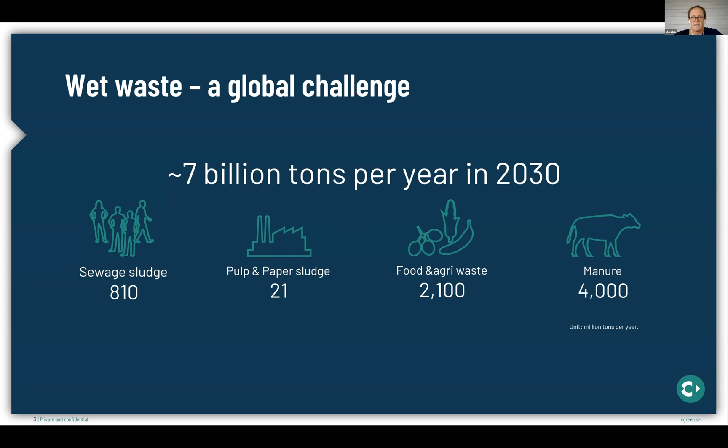The current ways of sludge handling are simply not good enough. They all come with severe impacts. They cause immense emissions of greenhouse gases. They risk harmful substances leaking out in nature. They're not infinite, or they consume huge amounts of energy. So clearly, we need to find something better.

At C-Green, we want to change the mindset from seeing sludge as a waste stream to seeing it as a source for useful resources. We want to make it valuable. We enable the recovery of carbon and phosphorus, while at the same time ensuring that harmful substances are contained or destroyed. How do we do this?

By combining the two processes of hydrothermal carbonization and wet oxidation, we transform the sludge into hydrochar in an energy-efficient way. 5 kilograms of wet waste are transformed into 1 kilogram of dry hydrochar. This means a huge volume reduction of the material that needs to be handled. The decomposition that is emitting methane and nitrous oxides is effectively stopped. The hydrochar is stable, odorless, hygienized, and safe.

We go from a substance with negative impacts, high risks, and global costs to a useful product that can find several new applications. Hydrochar has a much higher low heating value than sludge and can be directly incinerated and used as a biofuel. Hydrochar contains carbon and other nutrients and, depending on the origin of the sludge, can be used as a soil amendment product.

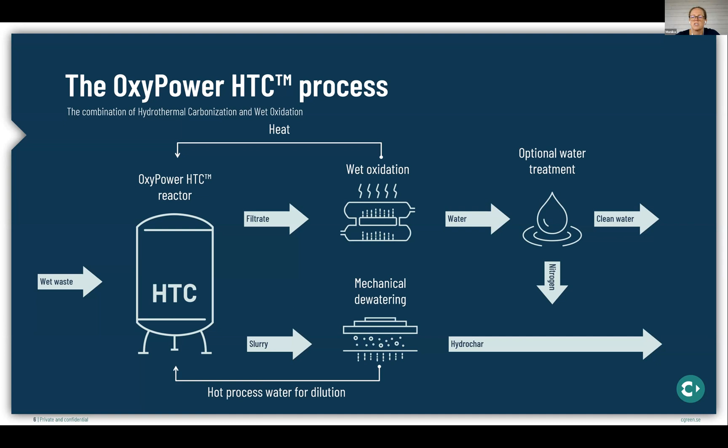C-Green is designing its process in 3 different sizes to meet the market demands. The small HTC pilot plant, T1, can treat up to 1,000 wet tons of sludge per year and is aimed at small remote wastewater treatment plants looking for volume reduction and sanitation of their sludge.

It can also serve as a first step for validation of the technology prior to decision for investing in an industrial scale plant. The T5 can treat 3,000 to 5,000 wet tons of sludge per year and is designed to meet the needs of small municipalities, treating the sewage from 30,000 to 70,000 people. It can also be combined with biogas and serve medium-sized farms.

The T25 is the full-scale industrial plant. This one can treat up to 20 to 25,000 wet tons per year. The plant is built in skids in a modular design, which allows for scaling upwards by adding multiple parallel processing lines.

So who is C-Green? C-Green is a Swedish clean tech company founded in 2015. Our headquarters are in Stockholm, Sweden, where we also operate a state-of-the-art laboratory. We have one full-scale plant in operation in Finland, and we have a sales office in Rotterdam.

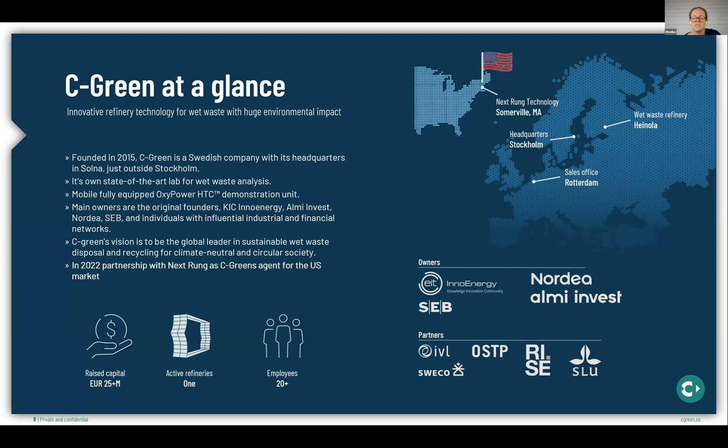Our first full-scale demonstration plant is set up at the fluting mill in Heinola by Stora Enso in Finland. Stora Enso is a top-tier global pulp and paper company. The C-Green plant has been in continuous operation for around 2 years, producing hydrochar from the plant's biosludge.

The project shows a perfect site integration where the hydrochar is used as biofuel, replacing fossil peat, and the reject water is fed to the plant's sewer, contributing with heat and nitrogen.

Together with the municipality of Heinola, Stora Enso and C-Green have carried out 2 trials with municipal sewage sludge. These trials have been successful and have produced a high-quality hydrochar at dry solid contents up to 70%.

More trials are also planned with interested stakeholders such as Finnish Gasum and with the feedstock from other mills within Stora Enso.

Currently, C-Green, together with waste handler Ragn-Sells, the leading waste management company and one of the biggest sludge handlers in Sweden, is in the process of building the second full-scale demonstration and development plant. Here, sewage sludge from the nearby municipal wastewater treatment plant will be treated.

The project will demonstrate a full circular solution for sludge that does not meet the quality requirements for direct spreading on farmland. Nitrogen recovery through stripping will be installed as an optional technology, producing ammonium sulfate liquid for the fertilizer market.

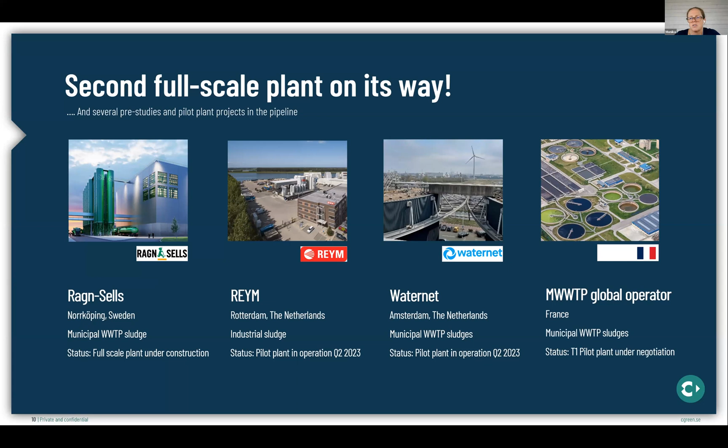So there is a lot happening in the market of finding circular applications for sludge management. And we are very pleased that in Next Rung, we have found a partner to look at the American market together. So over to you, John.

Just a quick word about Next Rung Technology. We're an engineering consulting company located in Somerville, Massachusetts, out of Greentown Labs, America's largest clean tech incubator. Many water and wastewater technologies have come out of there for commercialization, as well as energy, renewable resources, and plastics and fuels. Our mission is to support environmental technologies like this.

Since 2017, we've scaled up over 100 clients' technologies to true commercial scale. We work for first-of-a-kind, second-of-a-kind installations, as well as larger scale projects. Our projects range from $300,000 skids up to $200 to $400 million plants and projects.

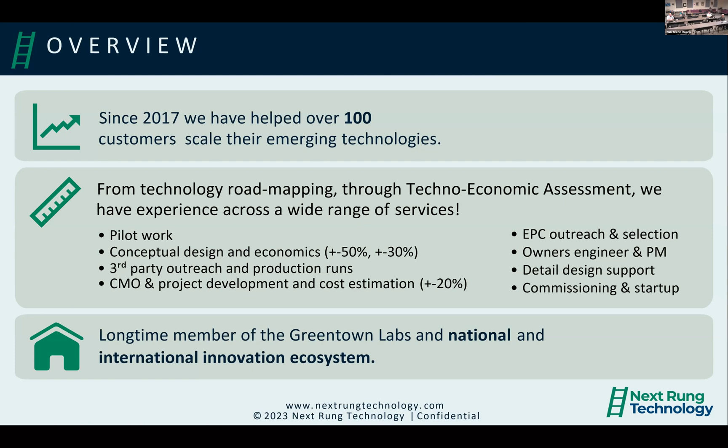We have been partnering with C-Green since 2020, when we did their first market study for coming to the United States. We looked at all the available sludge sources in the US and identified municipal biosolids as a key market for them and a good application.

I had the opportunity to go to the Heinola mill at Stora Enso and see the system in operation. You can see its size, it's modular—about 8 to 10 container-sized modules, processing all the solid waste from that mill's anaerobic digester, and literally producing one dumpster's worth of solids a day. Got to see the tremendous sludge reduction in action.

In particular, we think this becomes interesting and important when you're thinking about PFAS. The conditions of the HTC do not cause PFAS destruction, which requires a much higher energetic level. So primarily you would get aggregation of PFAS in any of the biosolids into the hydrochar itself. There's also some in the returning effluent, which would go back to the headworks of any plant it was located at. We think the solution here is to achieve volume reduction and upgrading of the solids at the right locations, collect those biosolids, and then if they do require disposal or destruction of the PFAS, to do that centrally, regionally at one location, as opposed to putting a lot of solutions out to discrete POTWs.

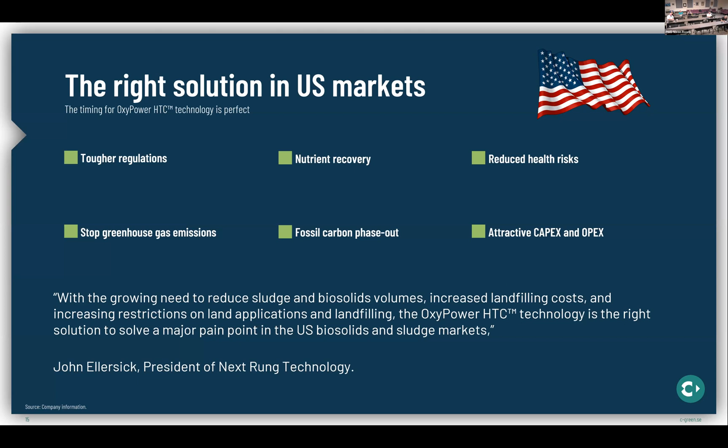As Monica said, the issues in the United States are similar to those in Europe. Places to dispose of biosolids are becoming more costly, or it's being banned completely. People are recognizing that there's greenhouse gases coming out of their municipalities at the back end, and there's something they need to do about it. Generally speaking, if you can reduce the problem to 20% of its original size, you can definitely address costs, even if you have to do disposal methods that are probably eventually going to be phased out. So that's our presentation. We'd be happy to welcome any questions.

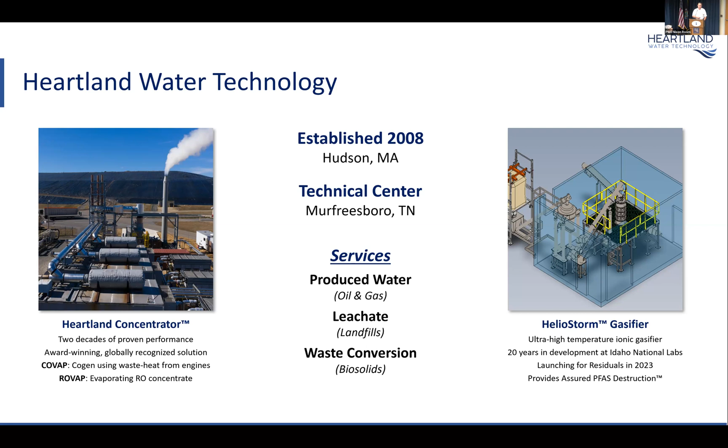So again, as has been said on Tuesday, and has been pointed out this morning correctly, we're here to focus on regulatory compliance that has become acutely necessary as a result of recent legislative and regulatory activities in the state. We believe we can provide assured PFAS destruction by virtue of our Heliostorm technology, and we do that by delivering complete molecular dissociation of the feedstock as it cascades and passes through the system from top to bottom. We'll talk more about that in just a moment.

But from that, we think we open up pathways to disposal certainty, right? Because we're producing products that are now innocuous, a char and a syngas, and they're PFAS free, and it now opens up disposal channels that might be more elusive to traditional strategies that focus on Class B, Class A biosolids.

And from that, we're going to operate it as a service. We offer this as a service. We're not here offering a capital piece of equipment for sale. It's a service that we provide. And by virtue of that, we can provide cost certainty for many, many years to come. We are certainly interested in the long-term contractual arrangements that have been described in the RFI. 10 years, 20 years is certainly within our wheelhouse, and is certainly our interest.

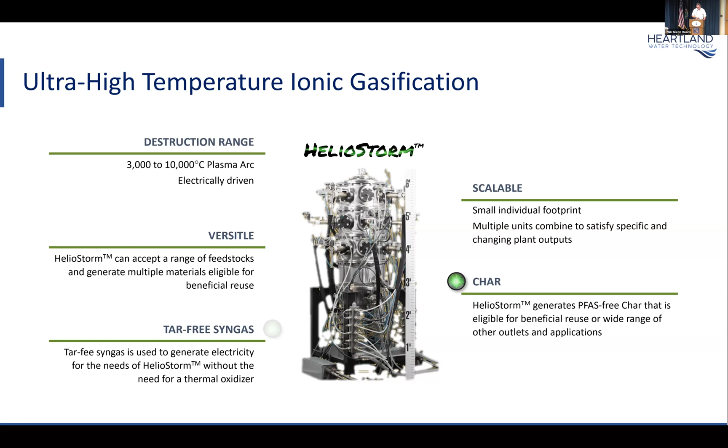So with that, I'd like to introduce now Brandon Davis, our Director of Engineering. As I mentioned, he's going to walk you through the next few slides, and I'll advance them for you, Brandon, if you'd like to walk us through the details on the unit.

All right, good morning. I'm assuming you can hear me? Yes. All right. Good. Hold on, I'm getting some echo. See if that's better. Still hear me?

Yes. All right. So the Heliostorm is an ultra high temperature plasma gasifier. We call it an ionic gasifier because essentially what happens is we generate free burning electrical arcs. And these arcs, as Jim mentioned, heat the interior of the gasifier up to that 3,000 to 10,000 degrees Celsius range. And that tends to generate a lot of ions. And that ion field and that ion electric activity then tends to completely dissociate the feed material down to its constituent atoms.

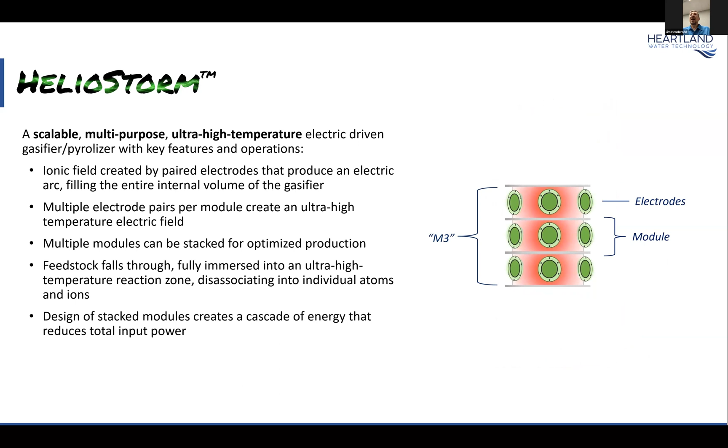As you can see on the graphic to the right, the model that we'd be using for this application is called an M3. And essentially what that means is that we have 3 of these plasma arc modules. And in each of those modules, we have 2 to 4 pairs of electrodes that generate these high temperature electrical arcs. And so you end up with a sort of cascade of energy, where as the feedstock falls in, it gets very rapidly heated up and volatilized.

And then those volatiles are exposed directly to those electrical arcs and those ions that are being generated. And that tends to dissociate things, and that completely breaks down whatever is in there to their atoms. And that is why this gasifier is very good at getting very high conversion rates, and also is very good at chemicals of concern like PFAS, breaking them down and completely mineralizing them to the constituent atoms. Do you want to go to the next slide, Jim?

The Heliostorm is different in that the anode and cathode are separated across the body of the gasifier itself, so that high energy electrical arc is in the gasifier itself. And so that means the feed material is directly exposed to that high temperature arc. And that's sort of the difference, sort of the secret sauce, and what makes this gasifier more effective and more energy efficient than your normal plasma gasifiers.

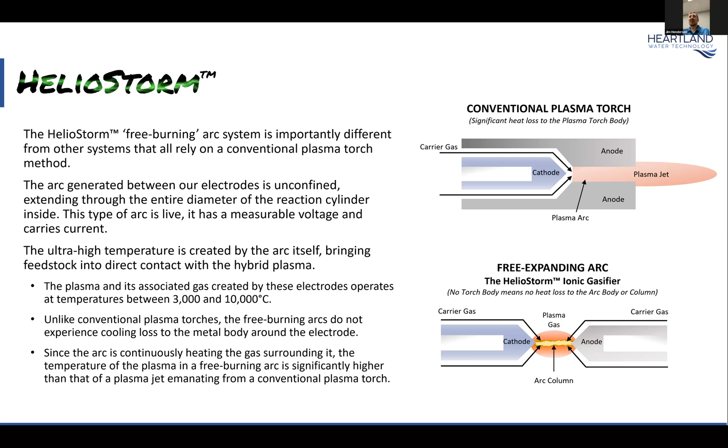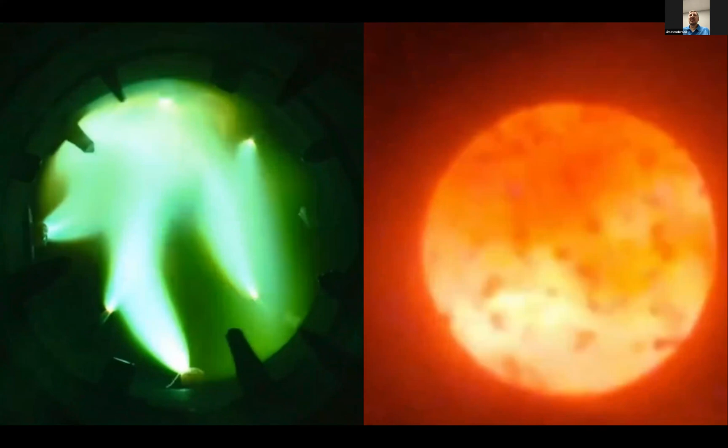On the right is another view of it. And you can see as the pellets fall into the gasifier, you can see how they're being rapidly devolatilized. You can actually see the wisp of smoke as things are coming off and being volatilized and generating that gas.

And then you can also see the very turbulent nature of the gasifier, that as these plasmas are being generated, there's a lot of high mixing, a lot of turbulence in there, which is really exposing all the gas and all the feed material to these high energy arcs, exposing them to the ions, rapidly breaking them down. And so it operates very efficiently, typically at about 4 or 5 tons per day for the M3 gasifier.

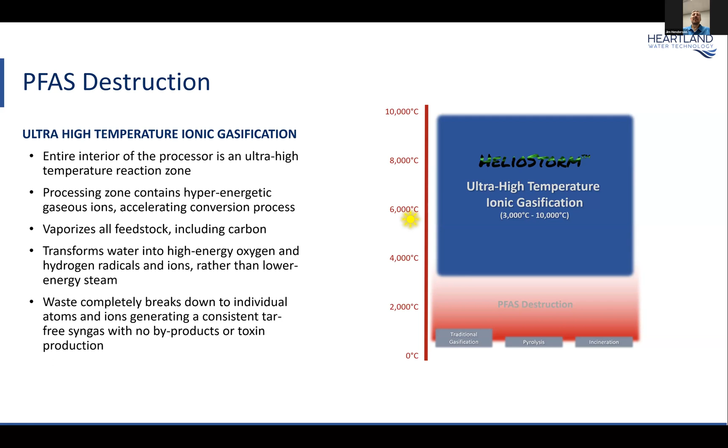And so you completely vaporize everything, including carbon, and then as you fall out of those plasma modules, you have a rapid quench as it cools off, and you reform the compounds basically according to thermodynamic stability. And so you make a lot of simple compounds, hydrogen, carbon monoxide, nitrogen. And because that temperature quenches so quickly, you don't get a lot of the secondary reactions. So you don't repolymerize into tars and oils. You don't have a lot of the byproducts that you typically get in other gasifiers.

Even the nitrogen itself in the fuel rapidly becomes nitrogen again and then quenches, so it doesn't react anymore. And so we have essentially no ammonia and cyanide and those sort of reduced nitrogen compounds that usually lead to NOx problems when you go to burn that syngas with other gasifiers. And I believe this is where you're taking back over, Jim.

Yeah, thank you very much, Brandon. Appreciate it very much. Great description and explanation.

So I mentioned earlier on that the versatility of our platform, Heliostorm, can accommodate a wide range of feedstocks, right? It doesn't know the difference between biosolids or heterogeneous waste or methane for that matter. It can accommodate it all. And as a result of the feedstock that you feed it, it can generate different products, right?

So in this case, we are intentionally focused on processing and managing municipal biosolids and other sludges, but are certainly involved in some other projects as well around, for example, methane and converting that into hydrogen and other opportunities as well. So our real focus as a company right now, again, I'll just emphasize, is on the municipal biosolids, creating the syngas and char.

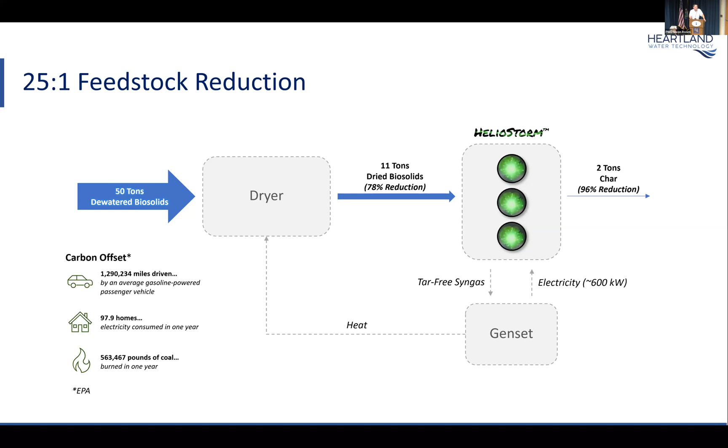With that, I'd just point out we can achieve some carbon offsets doing this. That's why we believe there's a real advantage to this technology, in that we take a lot of trucks off the road. It was mentioned on Tuesday, and I'll repeat it here: we take 4 out of 5 trucks off the road if we rely on this process, and there's some real gains to be had there.

So certainly a question in everybody's mind is documentation around the assured PFAS destruction piece. We are undertaking a very prescriptive approach to that. This year, we have 3 events scheduled to do just that. The first one was earlier this year with our M1 unit, and we have 2 more, but the first one was extremely encouraging. We in fact overdosed the feedstock purposely to quantify the amount of removal we are getting, and even with that, we exceeded our expectations. We now move into testing around the M3, to be completed this year. Brandon, would you like to comment any further on that?

No, you've got it right. We've done some preliminary testing on the M1 earlier this year, and we're planning to do additional testing. As you mentioned, in the early testing we spiked it with AFFF to get a very high amount of PFAS in there, and the results were very, very good. We're looking forward to the testing we're going to do for the rest of the year.

What's good, in terms of results? Well, we were in the very high 90% range of removal and destruction with a single M1 unit. We were purposely trying to overdose the feedstock so we could get a quantifiable measurement and have some residual left at the end for that first tranche. So it was intentional to do that.

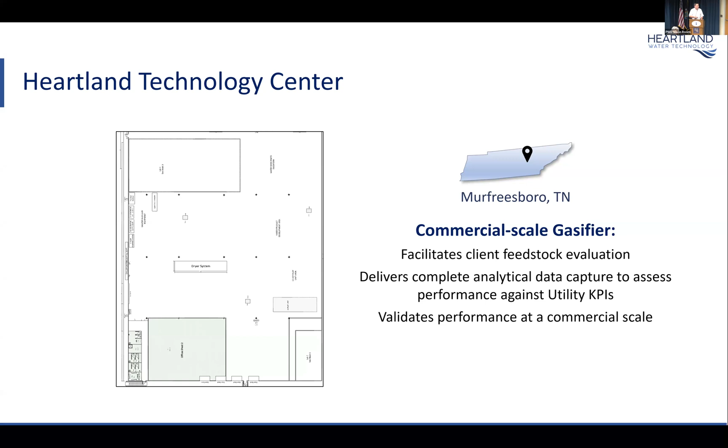It is operating as we speak today, and our official grand opening is in September, where we'll be hosting an event for that. But just a little peek back behind the curtain, here are some quick photos I took when I was there a couple of weeks ago, as the team was bringing the system online.

You can see in the center, that's the basis of the HelioStorm. There are certainly some ancillary things that go along with that, but that gives you a good example of the scale of the unit and some other ancillary balance of plant components, which you would see if you'd like to join us and see it for yourself. We'd love to welcome you.

Our project delivery is really based on a build, own, operate model. We are intentional about owning it and staffing it so we can deliver the guaranteed results you'd expect. We have the in-house team to design it and the resources to build it, without expectation of any client capital up front. We will fully fund the system, staff it with our own certified personnel, and provide it on a turnkey basis. That's all delivered for a one unit fee on a monthly basis, on a per ton basis.

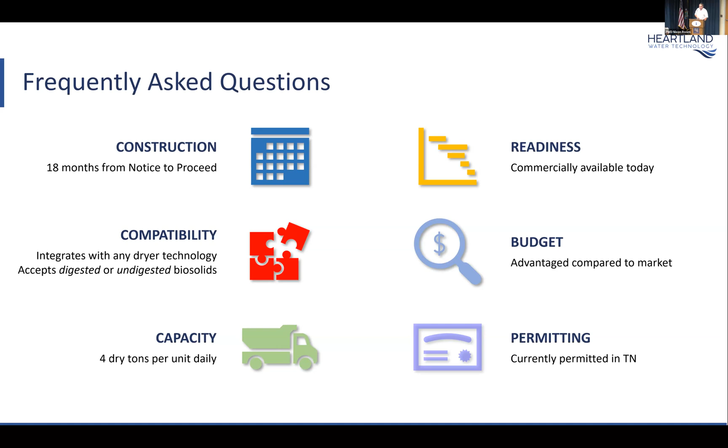And I hope I got in under time. Thank you, and if anybody would like to contact me, my information is there. Thank you very much.

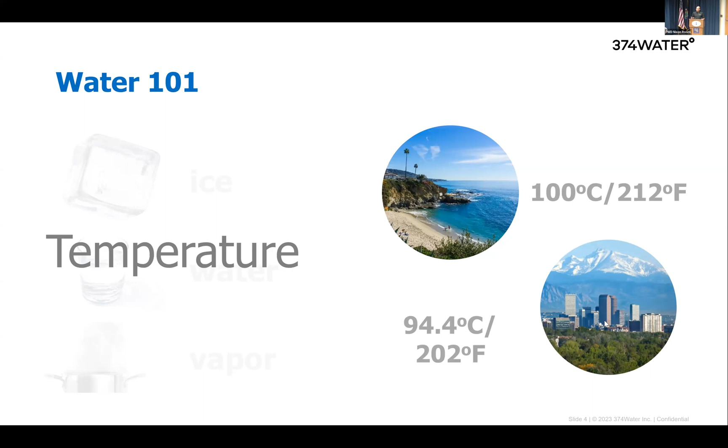If you were on the beach, you can boil water at 100 degrees C. This is a well-known fact, though it's an average, because there's still some variation in gravity, I would imagine. But if you were, say, in Denver, you would need far less heat to get your water to boil. This has to do with the atmospheric pressure being lower. So with lower pressure, you can boil water faster. On the contrary, if your pressure is high, it takes a lot of heat to boil the water out. So pressure is the second most important factor in phase change, and the reason I bring this up is they counteract each other.

Understanding this concept, we are able to perform what we are trying to do next, which is take your sludge and go straight to supercritical without having to undergo any intermediate phase change, which typically results in things like what you'll see in your boiler, some scaling. That's because your water evaporates and leaves out the solids. Whereas if you were doing it under pressure, the water will never evaporate. That's exactly what we're trying to do here, so we go straight from sludge to supercritical.

We are treating most of our waste in the water or slurry phase. So sludge around 15% is typically what we are targeting in the municipal application, but it could be pure AFFF, which is a liquid, so we could be processing liquids as well. It really depends on the caloric content of the waste as opposed to the dry solids of the material.

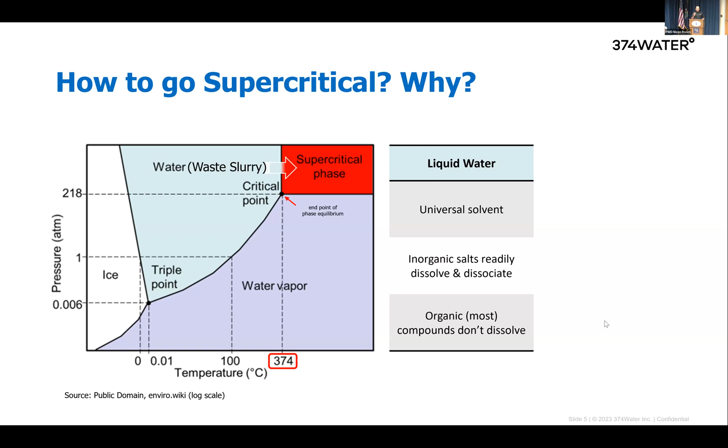Why I bring this up is when we go supercritical, that property of water actually flips 180 degrees. In other words, the salts will now precipitate out of the water, and the organics, the pepper, will now dissolve, dissociate, and disappear. So pepper literally will go from being grayish black to invisible in the supercritical fluid.

So pretty much any organic waste—it could be poop, it could be PFAS, it could be a piece of ham—whatever you throw into it will completely dissolve, dissociate into its most elemental compounds. This is pretty similar to what Brandon mentioned earlier about dissociation under plasma. The same thing is happening because supercritical is halfway between boiling water and plasma.

In fact, it's not halfway. It's much closer to boiling than plasma, because plasma on the screen would literally be out there.

So this unique property of water to dissolve organics is what we're trying to tap into. All we need to do is introduce an oxidant. In this case, we use air as the oxidant. So simply taking any organic waste, bringing it up to supercritical condition, and adding air, your resultant is carbon dioxide.

Clean water, and you get your minerals. When I say minerals, these are salts which are formed because the inorganic fraction will eventually form a salt, including your fluorine, if you have PFAS in your waste.

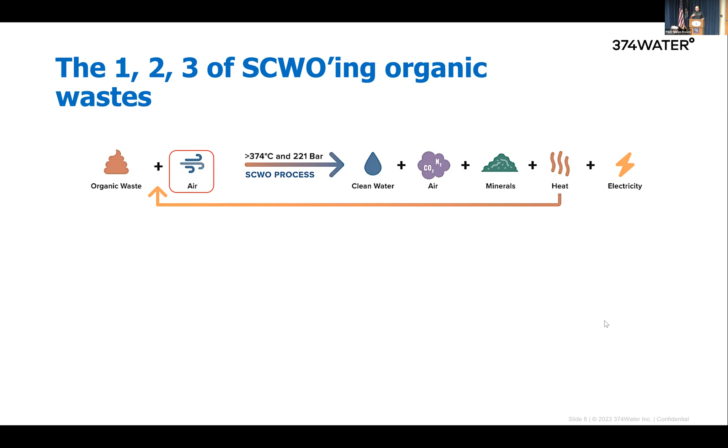So it's a highly energetic process, and you're able to do all of this in a matter of seconds. In a matter of seconds, you go from organic waste to clean water and energy.

How does it work? It's a pretty simple setup. Our reactor is a piece of pipe, so it's not a very complex machine at all. It's a piece of pipe under pressure.

We take ambient air, preheat it with the heat of reaction, and we do the same thing with the waste, preheating it with the heat of reaction. Simply by combining those two and introducing it to the reactor, you can take it from subcritical, unphase-changed gas and water or liquid, and go supercritical into one homogeneous medium, and that's where the oxidation happens.

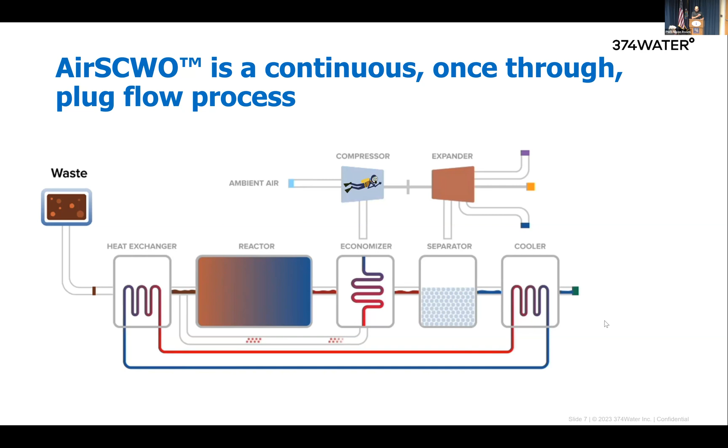The nice thing about a process like this is it's all happening under one homogeneous phase. It's not solids, liquids, and gases we are treating—it's all supercritical, which means your kinetics need to be set for just that one medium. We are not worried about how rapidly the gas is expanding in an incinerator, so we don't have to worry about 3 different kinetics to go after PFAS or any other compounds. We destroy all of it under one phase, very simple. The outputs, again, are very simple and benign.

You get your carbon dioxide, which we do count even though it's biogenic carbon dioxide, we would count it as a greenhouse gas. You will produce energy from the expansion of the gas itself being captured in an expander. You will produce distilled water. About 70% of the water will come out as distilled water, which means you can either disinfect and discharge it, or if there's a potential for reuse, you could use that.

And the other 30% will essentially carry those inorganic salts out. And if there's any residual PFAS, that will come out in this water, which comes out with the mineral. It's not in the air, it's not in the distilled water, and I will show data.

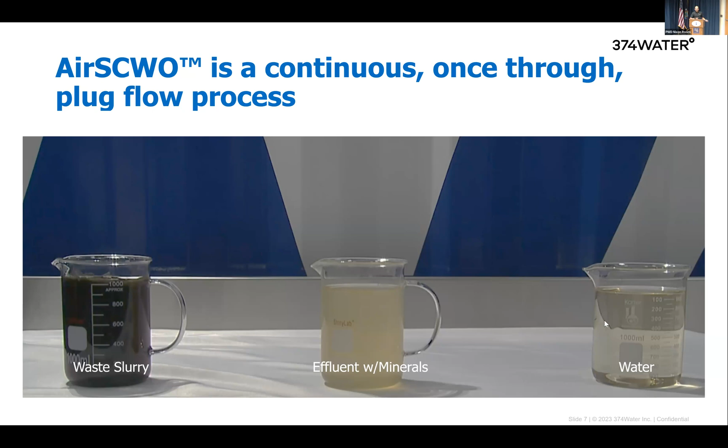So this is just an example of how it looks. It's not very clear on the screen, but you have waste going in, you get your distilled water, and you also get your minerals come out in an effluent, which needs to then settle out, and then you will separate. There's a separation step that needs to be taken into account for, which we don't do in our process right now.

So it doesn't matter what you put in, you can get the same output. In other words, if PWD has a drinking water partner who has GAC at their facility and they want to get rid of it because it has PFAS, you can do that too.

This is an example of GAC being slurried and processed. Of course, GAC being highly energetic, you'll have to dilute it down. So if you blend it with your sludge, you're able to still process it. Again, we are trying to target a certain caloric content going in, so it's not necessarily about the percent dewaterability.

Now, I already touched a little bit about how efficient it is, but I'm going to show you some data. This happens to be a sludge which had lime stabilized sludge from your state. And you can see here, we took about 6 seconds to treat this. No co-fuel, we were just dewatering it up to around 16% cake.

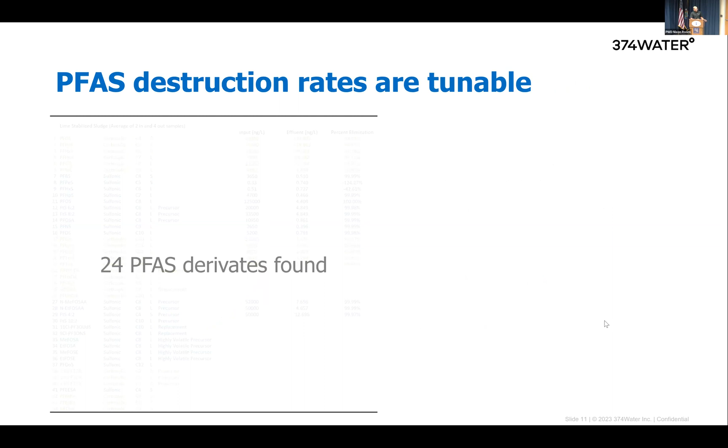You can't see the data here very clearly, but I've summarized it here. We found about 24 derivatives, and I'm going to give you a copy of this. And if I haven't already shared this, you can have the entire paper. And we got about 99.9% elimination.

Now, I'm sure people will say, why not 100%? We can get 100%, but it's not practical to use a system to get 100%, because in order to get 100%, you'll have to run longer or run it at a higher temperature, both of which will cost you money.

So instead, if you do want to get up to near 100%, the other way would be to simply combine this with a sequestering technology downstream. So you would treat the waste, and only a fraction, about 30% of the liquid from your sludge processing, which again is a fraction of your total wastewater effluent, would then be treated using a GAC or an ion exchange to get down to the levels of discharge water that you need.

So if you want to produce drinking water quality from a process, you are able to do this by combining these steps. Now, when you're done with this spent GAC or ion exchange or whatever, you can then take that and recycle it back, and we can destroy that as well. So essentially, we are able to destroy no matter what we put into the system.

The same can be done in a two-step process. Again, we don't recommend this for your scenario because the first scenario would be just as effective.

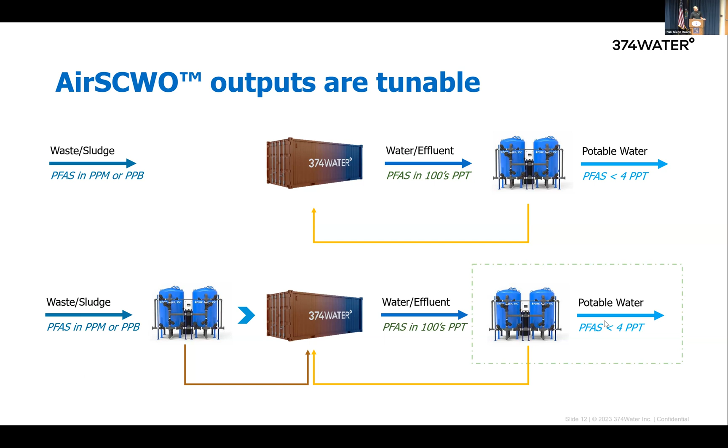So have we done fluorine balance? Of course we have done fluorine balance. We started as an academic endeavor, so of course we studied the hell out of this. We were able to get down to 100% recovery on our fluorine balance. So this, of course, took a lot of effort.

What we found is if you need to get up to that 100%, you really need to be running it at 37 seconds instead of the 6 seconds, which again is not practical, because at 6 seconds you can push X amount of volume. At 37 seconds, you're only getting a fraction of it. So your throughput will suffer if you go longer.

You can increase the temperature too, but the ideal scenario is to get about 3 logs or 3.5 logs of PFAS reduction through your process, and then take the small slipstream or side stream that comes off the process as an effluent and treat that using an ion exchange or GAC. That combination, I think, is the best way to go about it and the most cost-effective way of doing this.

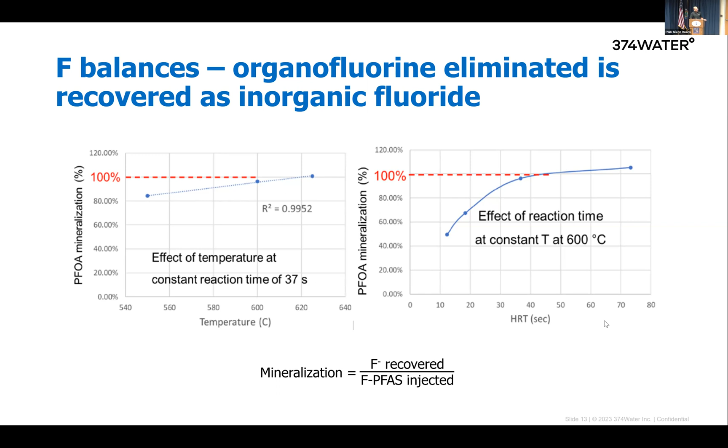Quickly, we did check for emissions as well, because that's a concern. Because when I showed the balance of 99.9%, we took into account the solids fraction, the liquids fraction, as well as the gas fraction. This was a test that EPA did on our process. The gentleman is from EPA.

We have done all kinds of tests with the SUMMA canister, with sorbent tubes. We have also done OTM 45 analysis. And we are also doing another test end of this month, again for EPA for another project. So we have seen that there are no PFAS coming off of the emission, which we're able to guarantee. So I think that's another thing that I need you to pay attention to: if somebody says they can do something, you may want to ask them for a guarantee.

So how does it compare with others? I'm going to skip this slide for the sake of not being controversial. This one, I think, is most interesting for you all. You can see here incineration, pyrolysis, gasification, higher temperature, lower pressure. Dryer again, lower temperature, lower pressure, and it doesn't do much other than just reducing your volume. HTC, wet air oxidation, HTL is getting closer to where we are,

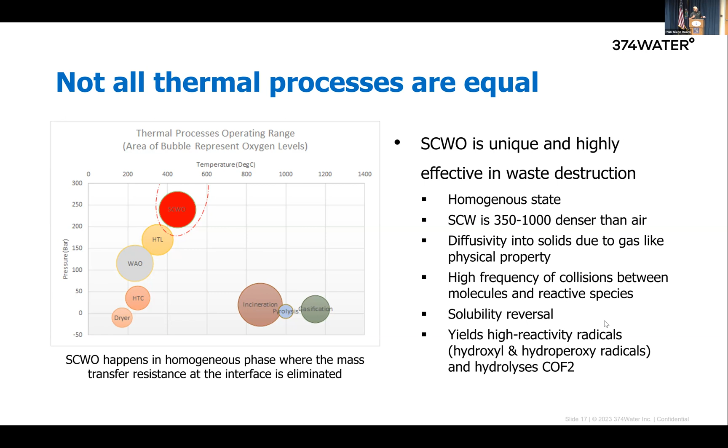but really supercritical in this boundary is all by itself in there. And the reason is that's the only process that works in a homogeneous state. There is no solid, liquid, gas. It's all supercritical. That allows us to really fine tune and be really efficient in getting rid of any kind of recalcitrant waste that you may have. You are not able to do that with any other technology without having any product of incomplete combustion or reaction, or a char or an oil or a coal, whatever the case might be; they all end up with some PFAS in it as well.

That's not necessarily true. Another thing we need to pay attention to is at what detection level those PFAS are being reported, because I've seen reports where someone had 2 parts per billion as the minimum detection limit. Guess what? At 2 parts per billion, there is no PFAS in your sludge in Maine at all. Ask him. You need to look at parts per trillion. You need to look at really low numbers. Anything that's not less than 1 part per trillion being reported, those numbers have to be questioned.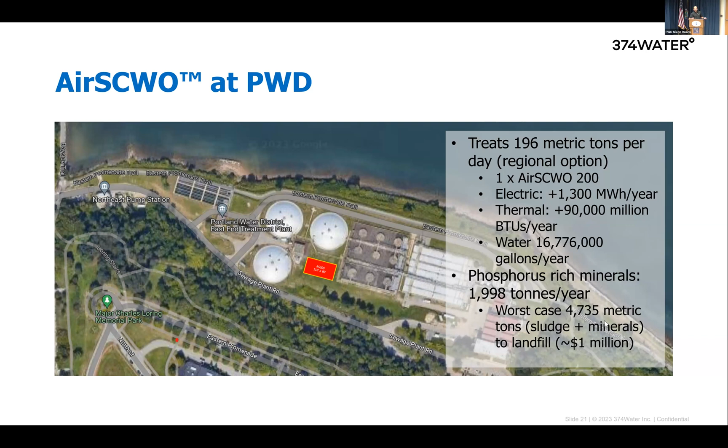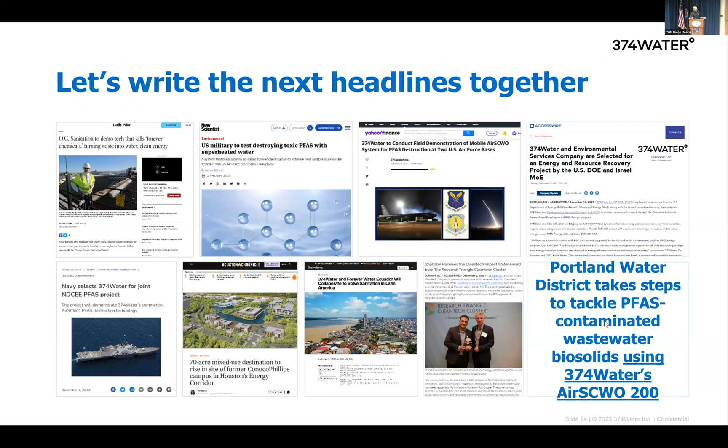So we do have a system that's getting ready to go to Orange County Sanitation. It is all made in the US except the expander. So it's, I would say, 94%, 95% made in the US, right here in Indiana. And we do have a lot of projects, so you're not going to be serial number 1. You will probably be 11, 12, 13, 14 maybe. But we can rewrite the headlines. I saw this headline with another name and I just added mine at the end.

That's it. So how can we help you? We can reduce your cost of sludge management, because you're not going to have sludge when all is said and done. That's number 1. We can reduce your equipment. You're not going to be needing 4 steps to get there. You just need 1. And we are absolutely able to guarantee you that you won't have any risk on liability, because we know we can destroy PFAS in solids, liquids, and gases, and we can guarantee it. So thank you.

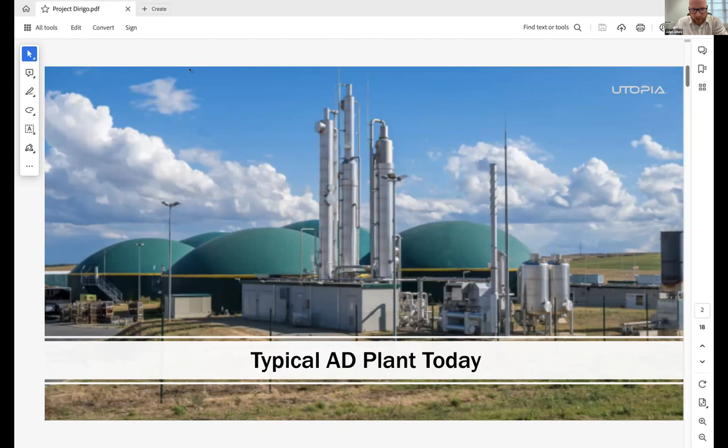So we've looked at the plant of tomorrow, is what we like to call it, the circularity at heart, the full shebang. We take all organic waste streams into our reactors, which I'll show you in just a second, from slaughterhouse waste, organics, industrial, STP, animal manure, typical biogas feedstock. And in terms of the byproducts we can create is obviously biogas, LNG, CNG, CO2, clean CO2 as a sellable byproduct out to the market, back for food grade and farmer grade.

Clean energy, which you'll see from our solid oxide fuel cell, and biofertilizer. But there is a caveat behind the biofertilizer that it is completely dependent on the feedstock. And in this case, in terms of STP waste, we won't be creating fertilizers. So this is the system that we have. It's Antec. It's a Norwegian-based bioreactor. It's a flow reactor that we have.

And this enables us to drive the feedstock through at a speed and control methodology that allows us to look at all the inefficiencies that CSTR brings and get rid of every single one of them. So you can see that now we have a single size of reactor. We used to have three sizes, but now we've got a 105 cubic meter reactor, and they can be double stacked, and they're all made from fiberglass. So very lightweight, very easy, and very efficient in their nature.

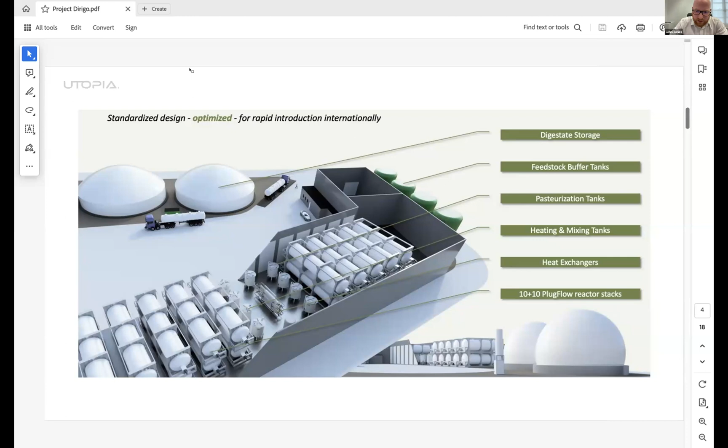And why are they efficient? It's typically because of the surface area that's inside the reactors themselves. So standard CSTR systems that you'll see down here, which you saw at the very beginning, typically they'll have around about 200 square meters of bacterial surface area. So what that means is in typical anaerobic digestion, when you have solids into the reactors, the bugs have to connect to those solids to eat the solids and create the gas.

So what we've created is a much, much higher surface area bioreactor with around about 1,600 square meters of surface area for those bugs to attach, and therefore more surface area for the actual organics to turn into gas. And you'll see obviously a honeycomb structure there. That's not actually what it looks like. It's just a representation of how we showcase how it's done.

But we've based this whole thing around a cow's stomach, because cows are obviously the most efficient at producing methane, and they're also the most efficient at managing their organics through their bodies. So we start off with a hydrolysis system that breaks down every part of the media into a homogenized waste stream, which includes the carbohydrates, fats, and proteins. And then we have an acidification process included within the reactor.

So once we have small homogenized waste streams gone through, then the organics that are left, the acids break those down into further gas production, which gives us the acetic, CO2, hydrogen, and then obviously methane and CO2 production. With the yields that we're looking at, because of the surface area, typically the throughput values that we can get on this, we're looking at around about 3 to 5 days of processing time, instead of the 45 to 60 days that you would have on a standard CSTR system. So much more processing rate at a much smaller footprint.

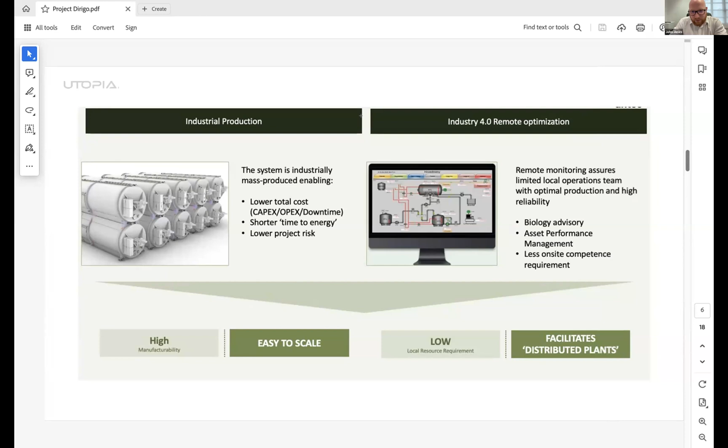And the scalability is exactly what we've focused on to make sure that we can scale and downscale these processes as much as we want to. So we've been working very diligently to make sure that this whole system is as efficient as possible.

Then we come on to the PFAS side of things. So if you can imagine on a standard CSTR system, what we have is a very thick sludge or digestate that comes out the back end. In terms of the Antec digestate, it's almost like a cup of tea, so you've basically got very little organics in there. It's a very loose, very thin liquid, which is absolutely perfect for the Antec system.

Now, what it does is it breaks down the covalent bonds and the free electrons and breaks it down into a mineralization part. So the radicals that are left behind are broken down into its mineralization and then completely destroyed, so that you basically have 99% PFAS reduction throughout the entire process.

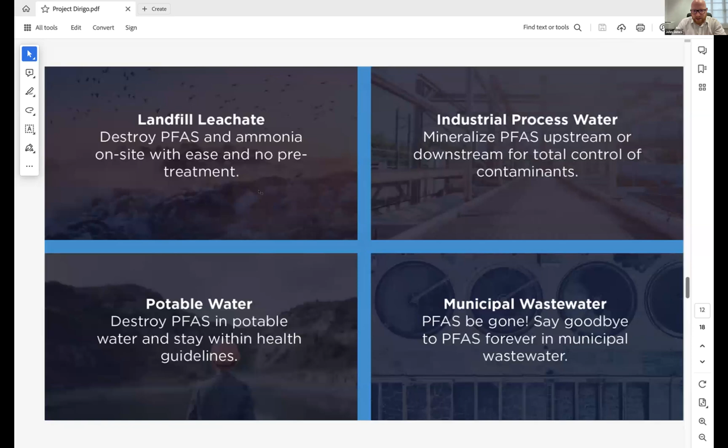So it's completely in line and completely independent from the digestate that comes off the back end of where we're at. And that's exactly what we're trying to do here, is that we're trying to increase modularity so that it matches the same scale of our bioreactors compared to our PFAS destruction systems, so that we can open the door to allowing the actual sludge and the STP sludge to be used as a biogas medium.

What we want to do is follow the energy chain right the way across, every single part of the organics that we have. We want to make sure that we can monetize them as far as we possibly can do, and make sure that we take that completely within the EPA limits that are there today.

So we think that, and we don't think, we know that putting these two technologies together is going to make a huge difference in terms of opening up the STP sludge for biogas production.

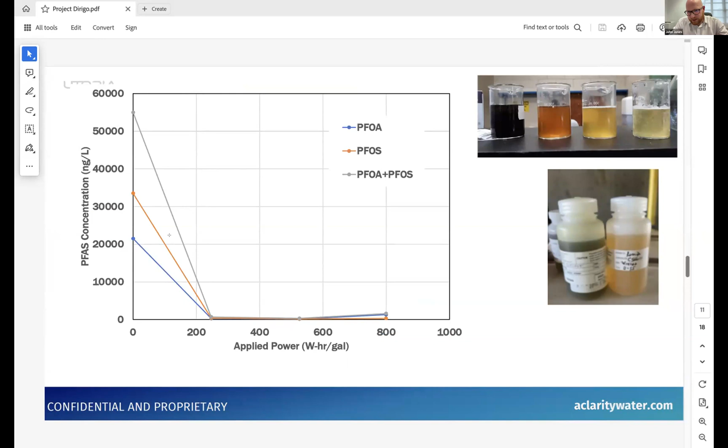And again, because of sizings and limited space in typical STPs in towns, you've got a lot of smell issues. You've got a lot of typical biogas, organic processing side issues. But every single thing that we have is completely closed loop. So there's no odor emissions. There's nothing there that we can deem to be an issue inside small townships.

And then in terms of the power generation, we look to the Bloom energy cell. And the reason that we've done that is for two reasons. So the first reason for Bloom is because of its efficiency. So we can polish up the gas to come into the Bloom cell at 60% plus efficiency.

So if we looked at the CHP, the combined heat and power systems of just burning the gas, we're increasing efficiency by quite a considerable sum. And then also the space constraints as well. These are very tight-knit systems that are very, very efficient in space and energy generation.

But also the fact that when we're looking at CHP, we have emissions. With a Bloom cell, we have absolutely no emissions whatsoever, other than a hot gas that's coming from the actual electrolyzer itself. So also with some of the issues in terms of transmission lines and being able to actually get the energy on the grid, what Bloom and its always-on system, or what we call a microgrid system, enables is to actually smooth the load of renewables that are coming online and the demand of the grid.

If you imagine a lot of the renewable sites out there, solar power that's going to be put on some STP sites if you have space, or wind, these carry variable loads that are very difficult for the grid to understand how to take, because they can't smooth the load to accept it when it needs. So this reduces the actual capacity and effectiveness of renewable energy.

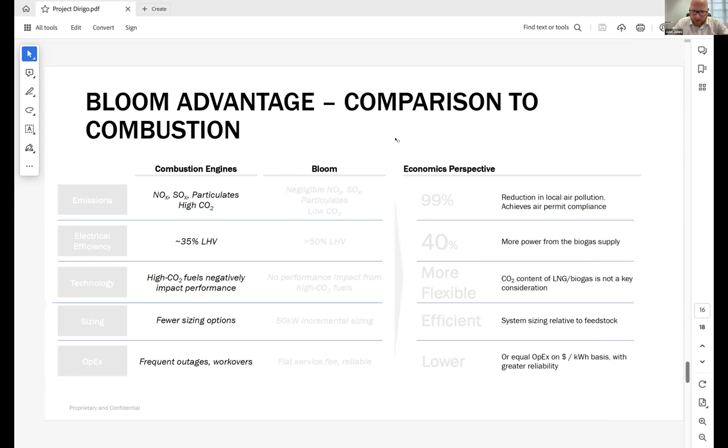So in terms of the status quo against flaring, combustion engines and everything above, we really are a cut above the rest in terms of the efficiencies that are out there, and the available options to us to actually go and drive efficiency as far as we possibly can with the cleanest, most efficient environmental targets that we can hit.

So many questions - it's a rapid fire fly through, because usually I talk forever, but we have each of the prospective stakeholders from each of the technology companies on the call. So if you want to ask any questions, they'll be happy to answer your questions.

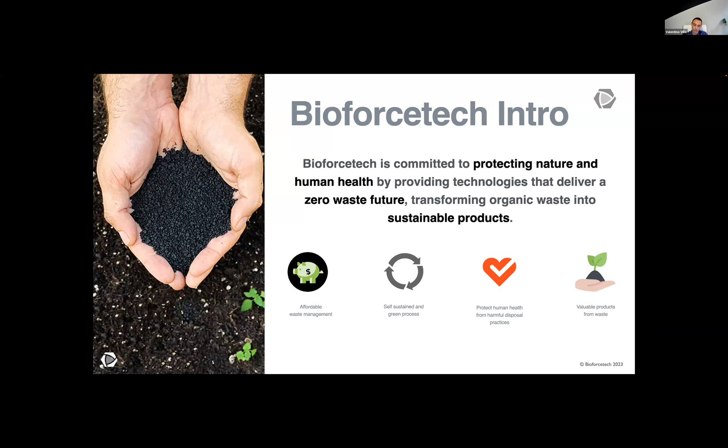If we look at today's situation, and this is also part of the reason we're all here to present amazing solutions and systems, currently about 90% of biosolids and residuals in the US are disposed of in landfill or utilized as land application. We all know the situation, especially with the state of Maine, but other states and counties are following the same trend. Landfill has never been a great solution for organic waste and biosolids specifically, although it does have its value.

We're seeing a lot of pushback from regulations and agencies regarding utilizing these biosolids, between landfill and land application. This is really why we are here and why we keep pushing very hard to embrace more sustainable solutions for the betterment of our planet and our communities. At Bioforcetech Corporation, we see organic waste as a real opportunity. There are so many benefits we can bring to the table and to the communities we serve, which can be summarized in 4 key points.

We focus around biosolid sustainable management systems. What we want to achieve: the first is to generate renewable energy from those biosolids, since there's quite a bit of energy content in them, just needing a sustainable and efficient system to extract that energy in the cleanest way possible. Removing contaminants is another of our high points and value propositions, being able to remove CECs, PFAS, PFOA, microplastics, and so on from the biosolid stream that we process all across the country.

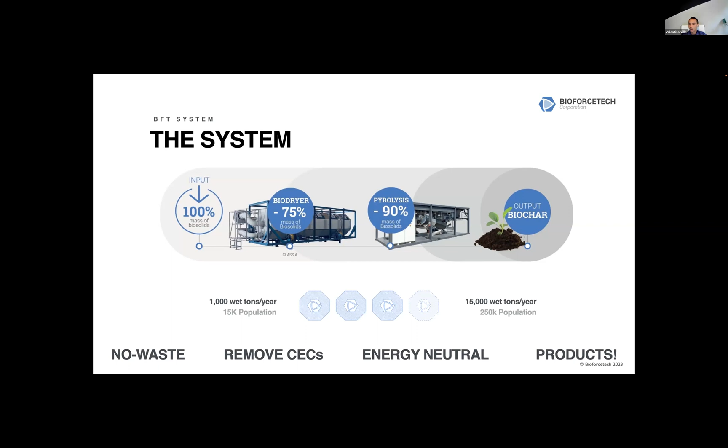Again, the goal of the combined system here is to stop producing waste, but to start producing resources and products. Of course, removing CECs such as PFAS, PFOA, microplastics, is something we care about very much. And being able to deliver a system, as far as the combination of drying and pyrolysis, that can be energy neutral from a thermal standpoint is another of our value propositions here, and something that is possible with the combination of our combined machines.

So biodrying, just quickly here, is a biological batch drying system that relies on mesophilic and thermophilic bacteria that are already present in the biosolid stream that the system receives and processes, in order to be very efficient, saving up to 70% of the energy compared to any other dryer available on the marketplace. It operates at 150 Fahrenheit as far as the maximum temperature, so about 65 degrees Celsius. That brings a lot of reliability and ease and safe operations compared to other dryers that may be operating at 300, 400 degrees, with some concerns as far as reliability and safety. Again, it can work with undigested and digested sludge.

It is best for implementation between 1,000 and 15,000 wet tons per year, and is of course fully automated with 24/7 operations and 95% up running time. The output from biodrying is going to be Class A or EQ compliant. We follow EPA 503 to achieve that status. Of course, some of the parameters will need to be in line and online within the biosolids that is fed to the system to result in a Class A or EQ compliance product.

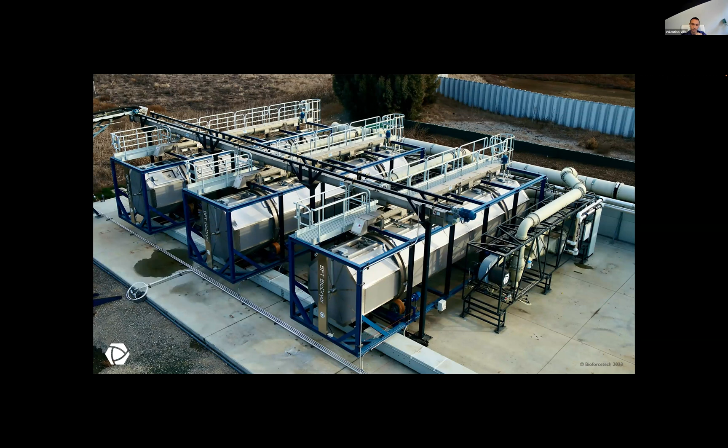Some pictures just to show scale, implementation, and how we design projects. This is a picture in a system with 3 units. This is another one with 7 units, 4 units, and 2 units. So just again to show modularity, scalability, and just as a reference, a single dryer has the capacity of about 1,000 wet tons per year. So if you see 7 biodryers being installed, there will be a facility that is able to process up to 7,000 wet tons a year, and so on. So again, this is just for references and to show you how we design and install these systems.

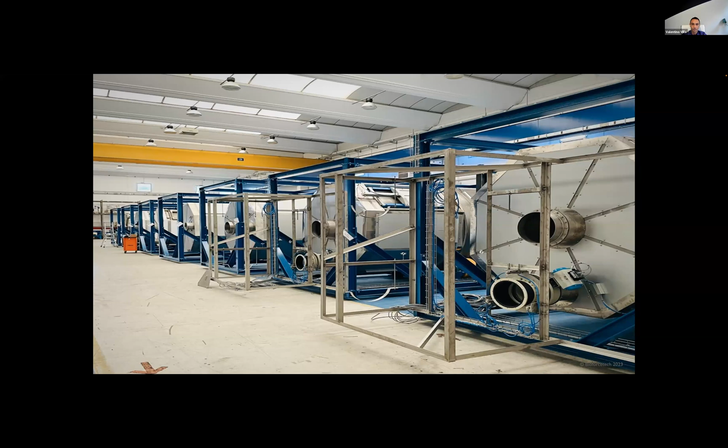This is a snapshot of the manufacturing facility. Everything we manufacture is currently done in the northern side of Italy, and we have about 40,000 square feet of space available for which we can produce up to 30 machines per year at the moment.

Switching side to what is most, of course, of interest for today's presentation and discussion is our pyrolysis system, which is the second machine. It's the system and the solution that is able to, again, give value to waste, producing high quality carbon biochar, producing renewable energy in form of hot water that, of course, our dryer can benefit from to reduce the needs of any energy from the outside, removing CECs, again, such as PFAS, PFOA, microplastics, and of course, we still follow the modularity and scalability aspect of this solution and system as well.

I would like to state that our system has been designed for the ones of you who are familiar with pyrolysis. I'm sure you've heard some of the presentations before. We designed our system not to produce any tar, any oil, and avoiding any type of condensation of hydrocarbons onto the end product. So we can guarantee a very high quality of carbon product at all times, and of course that will be in line also with new regulations and carbon credits issuance, because of course we have met all of the highest conditions for quality and for reliability.

Briefly talking about permitting, Bioforcetech Corporation, I believe, is the company that pioneered the pyrolysis movement across the United States of America. We had to face and deal with the first ever installation on municipal biosolids in the US for pyrolysis processing. So of course it was a very challenging time for us, but we were successful. We received back in 2016 the exemption from the EPA as far as not being considered an incineration technology, not subject to any of the SSI requirements, but it has been certified and deemed as a pyrolysis system.

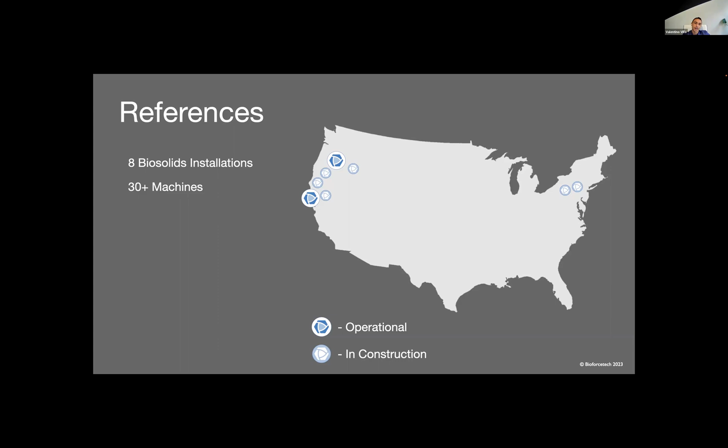Some of the references and customers who are embracing our sustainable system and solution: we now count 8 biosolids facilities in the US with more than 30 machines being sold, installed, or yet to be installed. You can see some of the dots on the map. And another great market that we serve is, of course, Italy, where we have 8 biosolids installations with more than 20 machines being sold and utilized in that part of the world as well. So just to summarize it again, everything we do very much revolves around the biosolids industry and world. That is truly our bread and olive oil, and that is truly what we focus on.

Switching section to our carbon, which is again the product that we produce from our advanced treatment system. We call it our carbon because it is our waste. At the end of the day, biosolids is everybody's waste. It is our planet that we need to really take care of in a better way. So that is why we call it our carbon. It is a trademark, and we identify again the quality and the composition of the product that is produced from our advanced systems. The concept is extremely easy to think about, although sometimes difficult to execute.

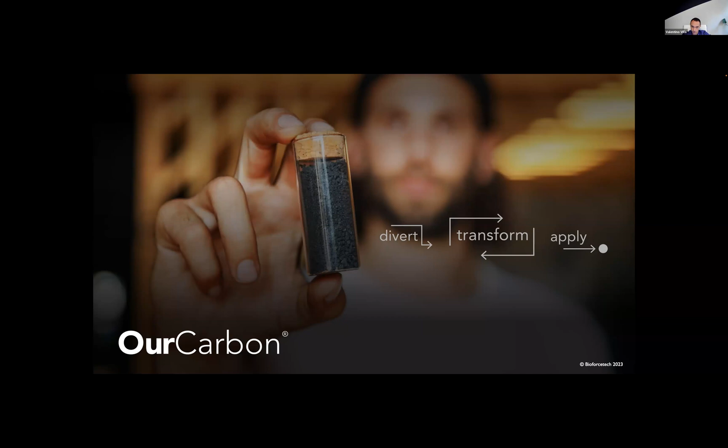But what we position ourselves is to diverting organic waste and biosolids from bad disposal practices, transforming them and applying our carbon where it's needed the most. We've done a very extensive research and journey as far as giving the most value on a sustainable and of course monetary aspect on our carbon product, and we started utilizing it as a soil amendment. Of course, the most straightforward and immediate answer for our questions of what to do with the end product.

That was back 5-6 years ago, but then about 3 years ago we expanded our research and application fields, and we started looking at our carbon as truly a new material. Nobody's really producing it at the moment other than Bioforcetech Corporation in the US. So we needed to create markets. We needed to get creative on uses and applications. So we developed amazing fields for applicability of this product. And now we can narrow those down to mainly 3 fields and industries that we serve. Soil amendment, of course; concrete and pigmentation are the 2 new avenues, let's call it that way, that are pushing a lot of the product in a beneficial and sustainable manner.

So concrete, we position ourselves to replace some of the sand and aggregate material to be able to deliver a structural grade, sustainable and carbon negative concrete product. And pigmentation: our goal is to, of course, be as carbon mindful as possible. So we position ourselves to replace carbon black, utilizing our carbon as a black pigment for several applications that go from polymer to fashion to automotive, shoe wear, and so on.

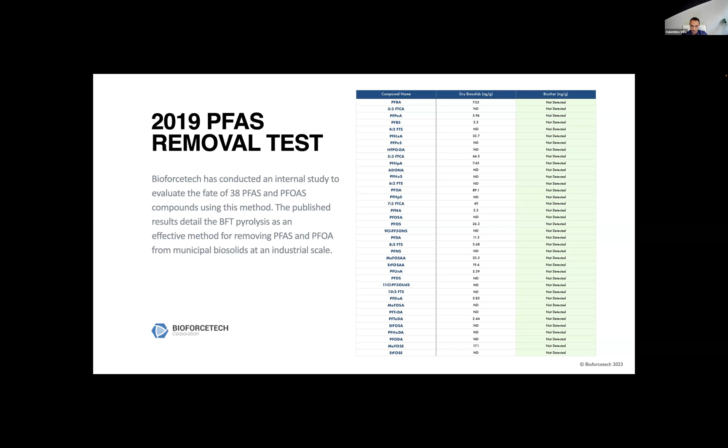We identified 38 target PFAS and PFOA compounds, and of course, we ran some independent testing on wet and dried biosolids and the resulting our carbon from the same processing train of the equipment. We utilized a certified lab here in California, and out of the 38 compounds, about 20 of those were identified in the wet and dried biosolids, but nothing was detected in the carbon product that the system produced. We were very excited, very happy to be seeing these results, but of course we knew that there was going to be so much more to be discovered. Even today, there is still so much that is unknown, but we're working very hard on finding the right answers and solutions for all of the people that we serve.

So in 2020, we had the opportunity to work with US EPA. They had assembled a great team, the PITT task force, that was very much focusing on PFAS solutions. So they were looking for solutions to destroy PFAS, and we were the only company that had an up and running system for municipal biosolids. Of course, we decided to work with US EPA and try to find some of the answers that were missing. So the main two questions were, can we eliminate PFAS from biosolids? And if so, how and where are they destroyed? So the test was conducted in August 2020.

41 PFAS were analyzed compared to the 38 from the previous testing. The biodrying and the pyrolysis system were the equipment that had been tested. Six 1-hour tests, and we analyzed wet and dried biosolids, our carbon biochar, tap water, scrubber water from the pyrolysis system, and also stack testing utilizing a novel method. Since back in 2020, the EPA didn't have an official testing method approved. So we utilized FTIR and canisters for that scope.

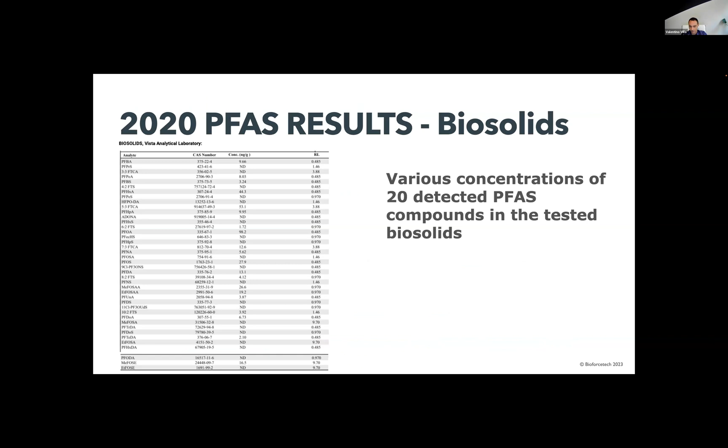Results came back very positively, again, especially on the solids metrics. Again, the wet and the dried biosolids confirmed the findings of the 2019 testing. About 20 compounds were identified in the wet and in the dried matrix. But our carbon biochar came back again with non-detect levels all across the 41 analyzed compounds. So that was amazing for us, also confirming the same findings with the EPA study, and that was again very encouraging.

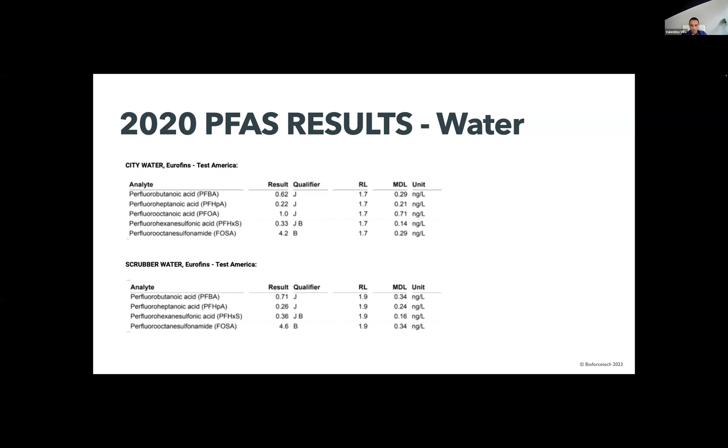Results on the tap water and on the scrubber water were very positive as well, in the sense that we have a scrubbing device for the pyrolysis system before going to the stack that takes care of some of the sulfur content of the biosolids, and of course it is quenched with city tap water. So results were in line in the sense that the city tap water had some PFAS and PFOA compounds detected in that stream, and the scrubber water, so discharge water, had the same levels and concentrations very much in line with whatever was found in the city tap water.

Stack air emissions were the $1 million question, and now it's probably the $10 million question, but they were very encouraging as well. Again, I need to say that the testing method utilized was novel, not formally approved, but what has come up from those data is some inconsistency in the results, in the sense that there were weakly observable CF4, C2F6, and some other compounds that may have been related to the dynamic spiking gas utilized for the test. Indeed, these results were not confirmed by the canister measurements that did not show any of the 17 analyzed fluorinated compounds above the detection limit of the instrument utilized. So again, that was very encouraging.

I think to date, our company, Bioforcetech Corporation, is the one that fully embraced the problem, trying to find sustainable solutions for this big issue that is present pretty much all across the world. We are well aware that there is still a lot of work that needs to be done, but we position ourselves always on the front line to be honest and transparent and to be fully invested to find out if this solution is truly effective, which we really do believe. So a peer-reviewed article was released in February 2022 with all the studies with the EPA that is, of course, public domain. So I'll be happy to share that for the full reading.

Findings can be summarized here. So the Bioforcetech system, the pyrolysis step, has shown great effectiveness to remove PFAS from the solid matrix, not leaving anything in our carbon product at the end. Small traces of PFAS were found in the scrubber water, but were comparable with the city tap water. And definitely more extensive source testing should be performed again, ideally utilizing the newest method from the US EPA. But so far, we're very comfortable and proud of the results that we obtained, knowing, of course, there's still a little bit to understand and to discover.

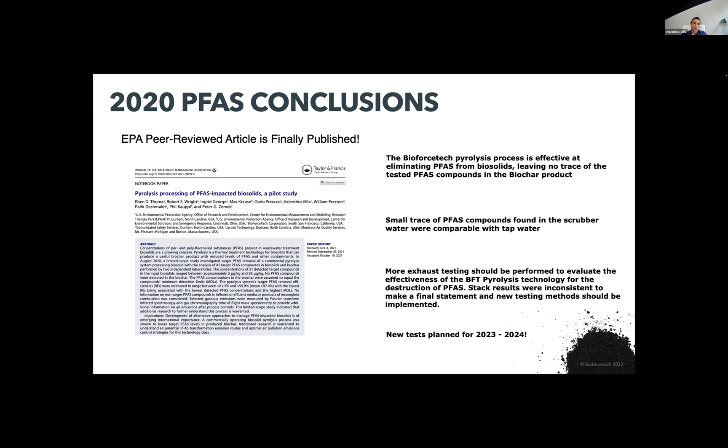We have assembled a great team of very high-end professionals that will be performing new testing, hopefully at the beginning of 2024. So we are looking forward to filling all the gaps and missing information, and of course, to presenting new and accurate data to the industry in the next few months. But again, to date, we do believe we have a great solution in hand that can be embraced all across the country and finally position ourselves and all the communities that we serve in a very sustainable manner. So that was the end.

I hope I managed the time a little bit efficiently here, and I would like to open it up for Q&A if anybody has any questions. Great. Thank you, Valentino. Yeah, if anyone in the audience, we have about 2 minutes for questions. Anyone here have questions? Is that turned on, Mac? Here, this is on.

Well, it's just interesting that you're not seeing the PFAS. Are you then speculating that you're removing the fluoride compounds in pyrolysis, or what's your belief about what's going on with the PFAS?

So I am not speculating, in the sense that these data are still preliminary. We did a lot of work, but there are still a lot of questions to be resolved and answered. What I am presenting is the fact that our system seems to be able to remove PFAS from the solids, as far as nothing comes up in the biochar at the end. Nothing seems to be in the discharge water, but we know we need to understand more the data and the effectiveness of this system.

Personally, I do believe that our system is going to be effective at removing and destroying these compounds, but I do not have certainty of it because, again, we're seeking new testing in the near future, hopefully to finally state that once and for all.

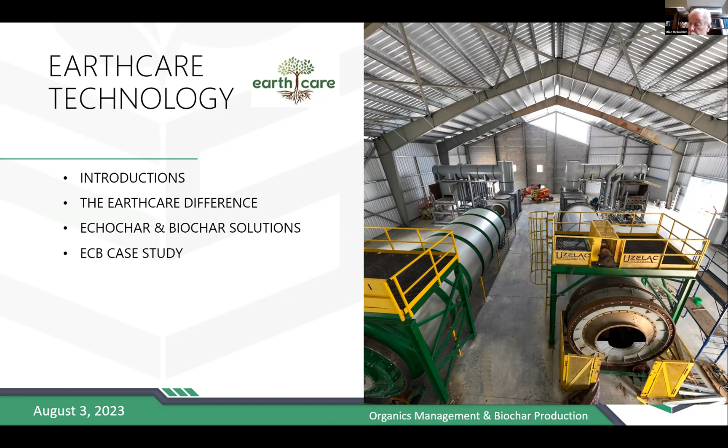Our company has, over the years, been focused on a variety of feedstocks, predominantly non-wood related, whether that is municipal sludges, MSW, agricultural waste, all manners of organics, but typically the higher ash feedstocks that present an environmental issue with disposal.

It's kind of amazing to me that every week I see an article or hear someone say that gasification is an exciting technology for solving these problems, but it is not proven — that it's still in the R&D state, or the facilities out there are at pilot scale but nothing is commercially available. And nothing could be more wrong.

We have 10 operational systems, all at commercial scale. We're currently installing 2 more in Pennsylvania and have a dozen others in some level of development. The oldest system we have has been processing dairy manure, and it's been in operation for 11 years.

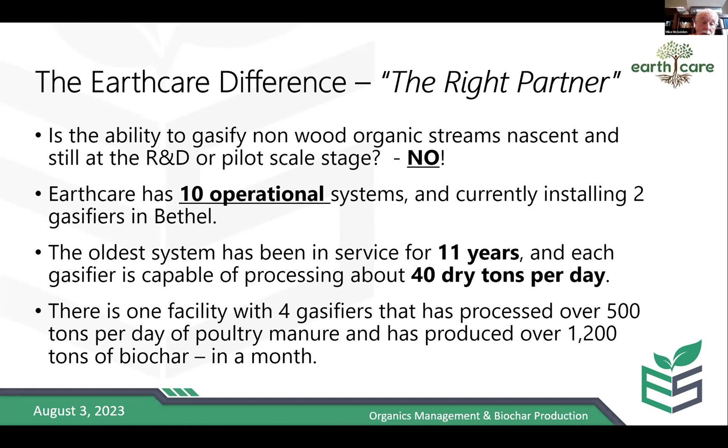So the concept that the technology is not commercially available is just not true. I don't know at what stage you have to get to before people start recognizing that there are proven technologies out there that can become commercially operational in a short period of time.

We have processed some wood, but typically we have focused on other feedstocks. We have processed every type of animal manure that I know of: biosolids, MSW, bagasse from sugarcane, digestate, shea nut waste, spent mushroom substrate, distiller's grain, just a wide variety of feedstocks with the same equipment. There are operational differences when you go from feedstock to feedstock, but it is still the same basic equipment.

We do not supply a technology. We supply a solution. When we develop projects, we put in the entire system, including training operators and startup. The systems that we have in operation have all been sold systems. The system in Bethel is the first system that we will own and operate ourselves. But we have typically just sold equipment to customers.

One of the pieces of, obviously, of any of these projects is, if the technology works, that's great, but they still have to be economically viable. And a big piece of what we have felt for 15 years that is necessary for the economics is to make a value-added product out of the byproduct.

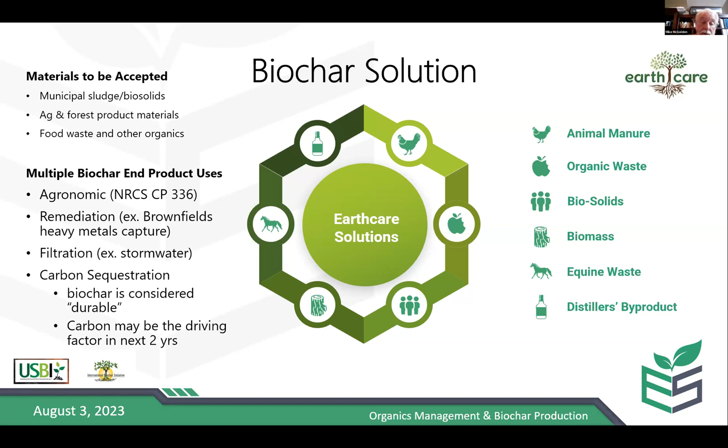It's been over the last few years, there's been just a worldwide change for how the world views carbon, and whether that's carbon credits or just decarbonizing our system and being able to produce a product that sequesters carbon has a lot of value that a few years ago was not perceived as such.

All chars are not created equal. There's a lot of research that has been done concerning biochars, but it's typically been done with wood-based chars. The chars from manures and biosolids have some very unique characteristics. And it is driven by the minerals that are in the chars.

And in a lot of cases, it is the phosphorus and the calcium that drives that. They provide an ionic particle charge that attracts heavy metals, that has a totally different application and totally different reaction when you use those chars.

One of our companies, EchoChar Environmental Solutions, that has been the main driving factor for that company, is looking at how it absorbs heavy metals and how do we make designer chars to enhance that ability.

Over the years, we have sold char for pure land application for row crop farmers. I mean, we have spread thousands of tons of char in cornfields and soybean fields for the ability to provide nutrients, to prevent leaching, prevent runoff of phosphorus and nitrogen, moisture retention. There's a lot of values that it provides for the soil.

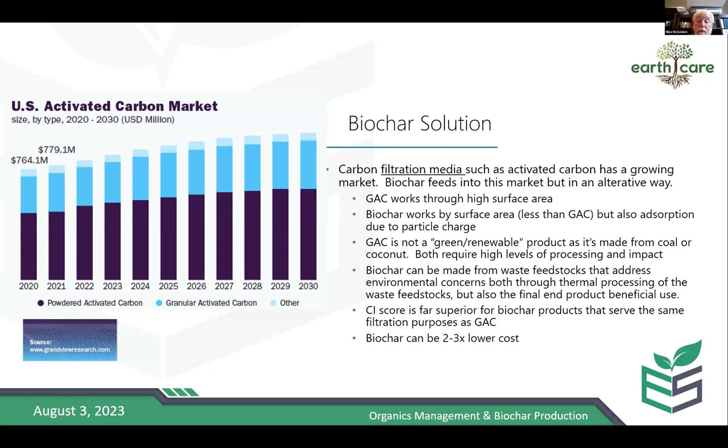We have installed 10 systems. We've got one in Indiana, one in Ohio, one in Georgia, and we're putting one in Pennsylvania. We've got 4 gasifiers in Saudi Arabia. We put in 2 projects in Russia, and this was before Mr. Putin decided he wanted to take on the world. And then we've got one in the Netherlands.

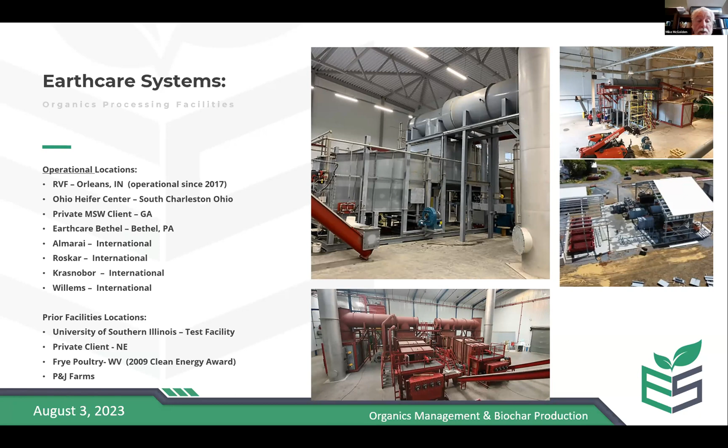On the right side of the screen is a photo of one of our latest installations. The right side and bottom of the screen are both photos of the system in Saudi Arabia, which has 4 gasifiers, and it's been running for 2 years now. As we develop these projects, hand in hand, we are working to develop the markets for the associated chars that are produced from those projects.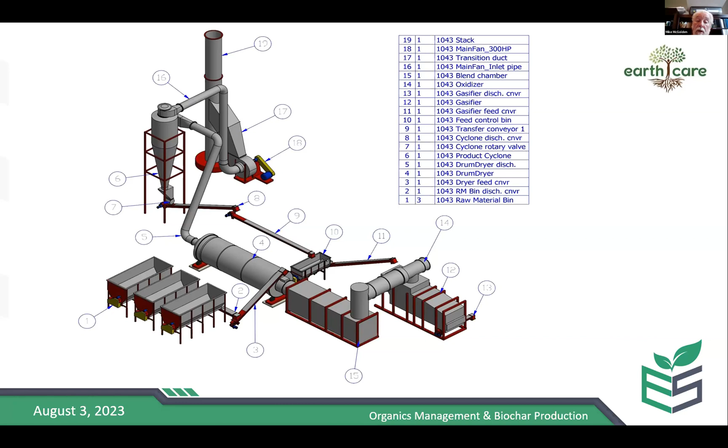Currently, we're installing a system in Bethel, Pennsylvania, that will process a mixture of biosolids and poultry, whether that's chicken manure, spent hens, or some type of agricultural residue. That facility will produce about 7,000 tons a year of biochar.

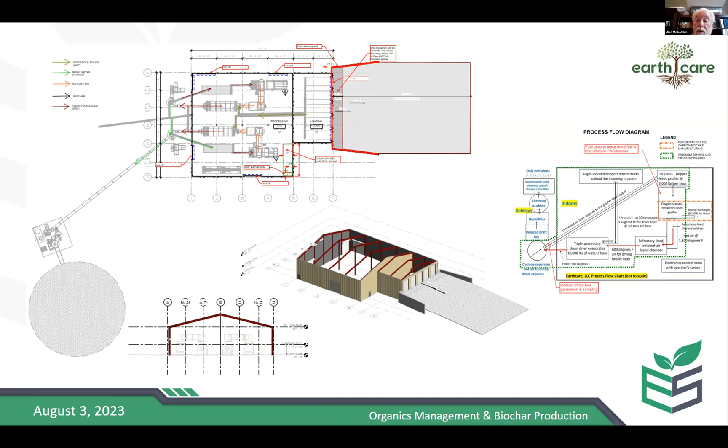And that's a closer view of what the building looks like, with the gasifiers feeding into a thermal oxidizer, into a blend chamber, and then into a drum dryer.

Part of what we had to do with this process is this building is under negative pressure, since one of our requirements is odor control. So we have negative pressure to control all the odors, not just from the system, but from the raw material handling side of the project.

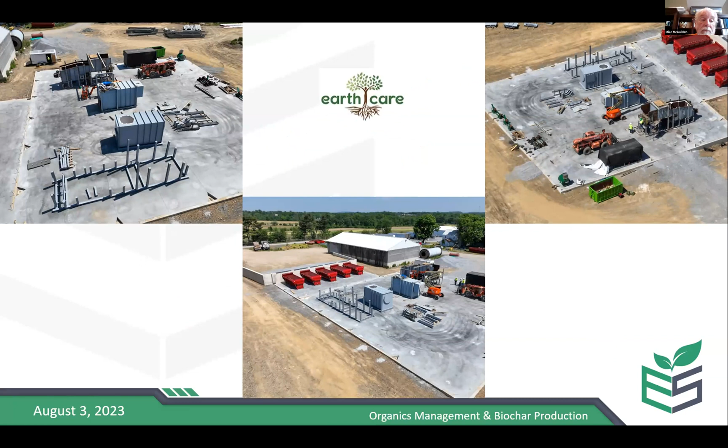Again, more photos just to show the things in progress at the facility there in Bethel. That's after the building is complete now, and most of the major equipment is already together inside.

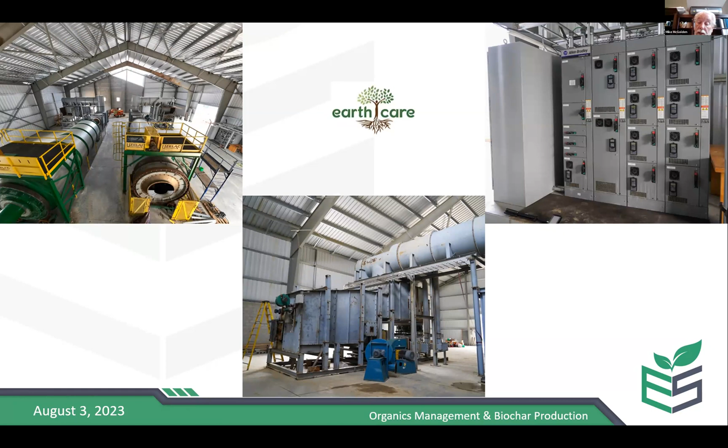These systems are web-based remote access, so we have the ability to monitor them remotely and also provide technical support without having to be on site.

We did site work and were able to get on the property and start installation in May. We have completed the gasifiers and dryers, and the building has been completed in about a 2-month period. The motor control center, one of the two motor control centers, is there.

We're running electrics now. The biofilter will be on site in September, and by the end of September it will be operational. Ramp up and commissioning isn't a long process, so we'll be fully operational in October.

It's been a little bit longer installation process than normal, simply due to some of the lead times with components from some of the vendors. We haven't had a lot of those issues in the past, and it seems there's still some hangover from COVID, where some components are still harder to get.

In the meantime, we've got a customer in Indiana, Riverview Farms, that's been absolutely wonderful. They have allowed us to bring people in and watch the system run, and we've had literally hundreds of people come in just to look at the equipment. We've also been able to do a lot of testing with materials prior to getting Bethel up and running.

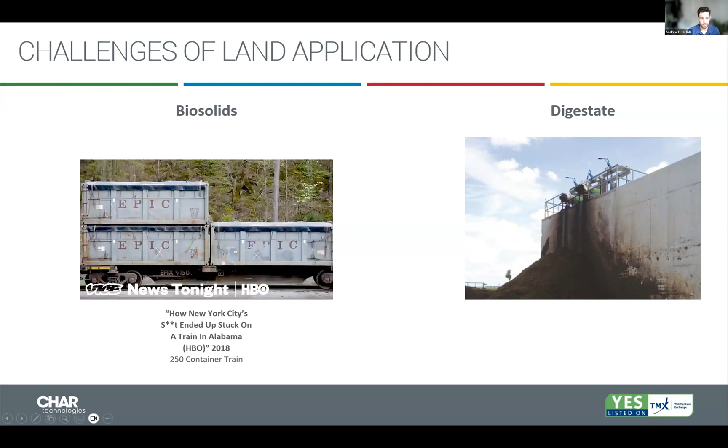So Char's pyrolysis technology is high temperature pyrolysis, you could call it slow high temperature pyrolysis. It's about a 30-minute residence time, and we're operating in a temperature range now that we've pushed even higher. It used to be an average of 800 degrees; now we're pushing to 850, and hoping to go to 950, even 1,000 degrees Celsius. Again, it's pyrolysis, there's no oxygen in our process, so it's thermochemical conversion. We work with a series of different groupings of feedstocks; today is all about biosolids, so I'll focus on that.

With biosolids, at high temperature without oxygen, we're converting biosolids into two outputs. Our emphasis is on making co-products, both syngas and biocarbon, also known as biochar. The syngas, typically for biosolids, because it's usually higher in moisture - although we usually take it dried - and low in carbon content, the syngas quantity and application is limited to typically generating heat for our process and for the drying process. We also looked at making electricity because our syngas is clean, since we're operating at high temperature without oxygen. It can go directly into an engine, so that would be an option that we've looked at typically with biosolids.

On the biocarbon side, if biosolids is the feedstock, we typically look at a traditional biochar fertilizer, soil amendment type application. Really like mixing with compost - it speeds up the compost time and adds a lot of value. And we've validated that we can eliminate PFAS at our high temperature.

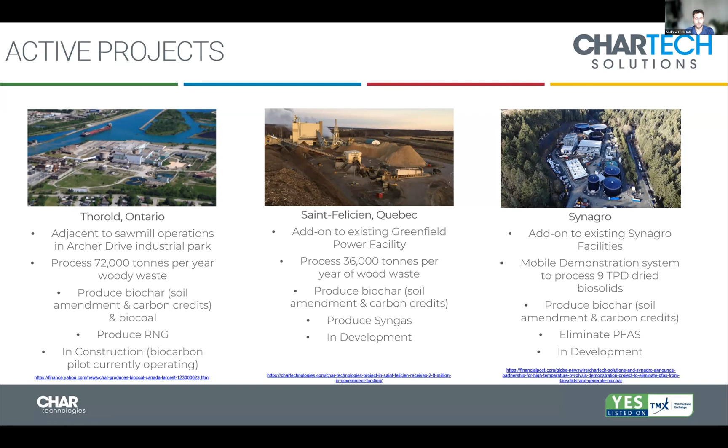So we often get compared to gasification because we're operating in a similar temperature range. The big difference is that there's no oxygen in our process. So that results in different qualities of gas. So again, our gas is high in calorific value. We don't need steam cycles if we want to generate electricity. Typically, gasification needs steam cycles to fuel a generator. And our biocarbon or char is going to be higher in fixed carbon because of the lack of oxygen.

Biochar is being more widely accepted, which is great for the space. And obviously, I'm a bit biased. I think every technology has a great fit. Depends on the site, depends on the feedstock. If you just want to make a lot of gas, gasification is going to be better. So just want to clarify the difference from high temperature pyrolysis to gasification.

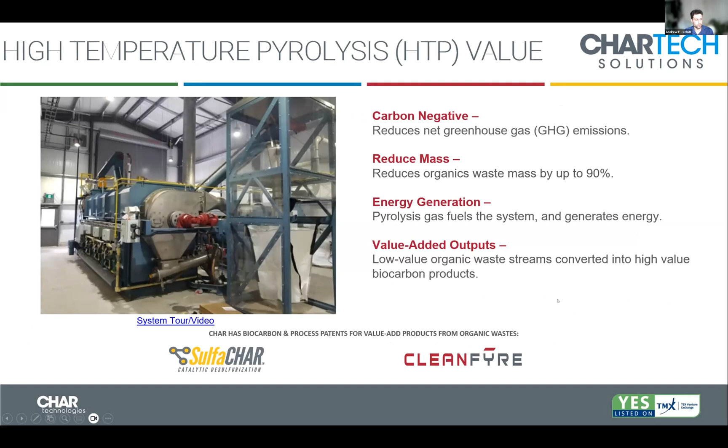But we aren't dryer specialists. We integrate with other dryers. We believe there's a lot of great vendors out there, like Andritz, that are amazing at applying drying for biosolids. So that's typically something we can include, or typically something we would work with Synagro on for the drying side. And our goal is to get the material to at minimum 80% solids content or 20% moisture.

We can actually run at any moisture content. We've gone as high as 70% moisture in some tests, but it's just not efficient from an energy standpoint. So if you get the material to 80% solids, that's ideal. 70% is really that break point where we would want to have a dryer. A lot of the projects we looked at, it's at 90% solids, the Class A product, which just means we're going to make more energy and more carbon or char.

So the material is fed into our kiln, there's a rotary airlock, so that's what eliminates any oxygen from entering our process. It's a rotary tube kiln, so the material essentially is tumbled through a tube in this large box, and burners indirectly heat that tube, again, ensuring that it's oxygen free and in complete combustion, to high temperatures, typically 850 to 900 degrees Celsius. The burners typically need natural gas for startup, and then once we're running, we want to run on our own syngas. So there's two outputs that have to be managed.

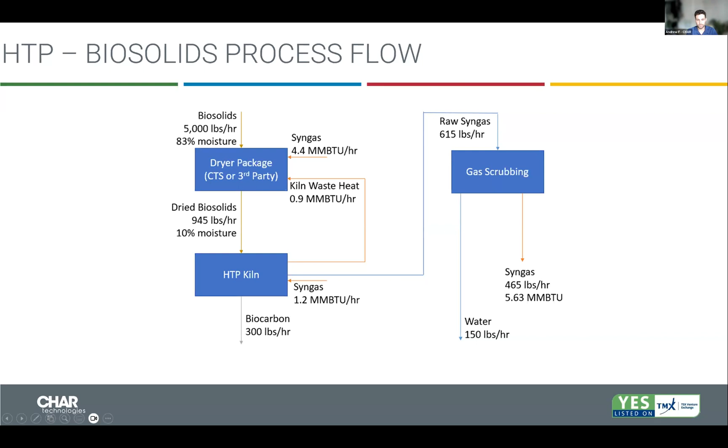So we've done a lot of tests around PFAS. We did lab scale tests in 2021 with a bunch of biosolids feedstocks from the US and Canada, operating at lower temperatures, so 500 degrees and 700 degrees Celsius. We saw some PFAS come through at 500 degrees Celsius, which was expected. You're really concentrating mass, but not hitting a high enough temperature to eliminate all of the PFAS, these 28 contaminants. At 700 degrees Celsius, we did see complete elimination in the biocarbon or char output.

So this led us to doing bigger pilot scale tests at our facility when it was in London at Stormfisher's site. And we analyzed both the char and the syngas. We operated the test at 840 degrees Celsius. We saw no PFAS in the char, but we did see small quantities of PFAS in the syngas. And to clarify, our pilot system does not do any gas cleaning. And this was only immediately after our kiln.

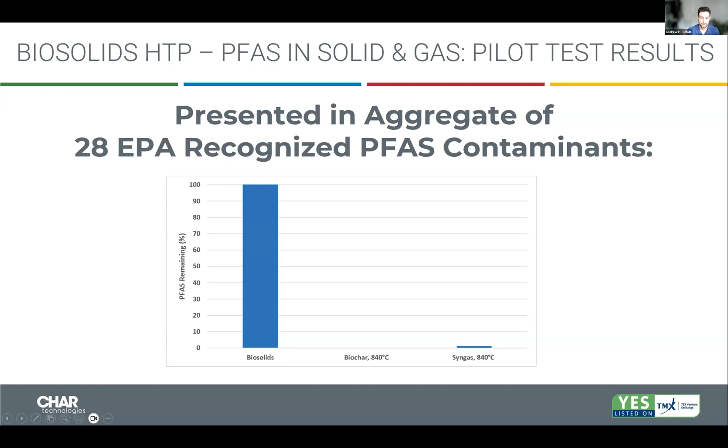So the deployment with Synagro, we're going to be doing gas cleaning or scrubbing. We'll analyze PFAS in the gas at every kind of stage within that process, and then also after our thermal oxidizers to do some stack testing. And we're very excited for those results. Our plan is to operate at, again, even higher temperature up to 850 to 900 degrees Celsius, where we're quite confident we won't see any PFAS in the gas.

So I always like to show a mass balance. I think it tells a really good story. We typically focus on our biggest kilns. Our demo or pilot system, whatever you like to call it, is on the small scale, but on the big scale, our biggest kiln can process about 25,000 tons of biosolids dried. And again, you'll get about 30% out, 30 to 40, depending on the feedstock, density, composition.

And we'll also generate carbon credits because it's biosolids based biochar or carbon. You generate a little less carbon credits than you do biochar. Again, that's because the fixed carbon content is a bit lower. And then that key number as well as the net available syngas. So that's after what we've taken for our process. That would be available for drying to offset natural gas that's consumed on site to generate heat. So that's really the preliminary mass balance for our process.

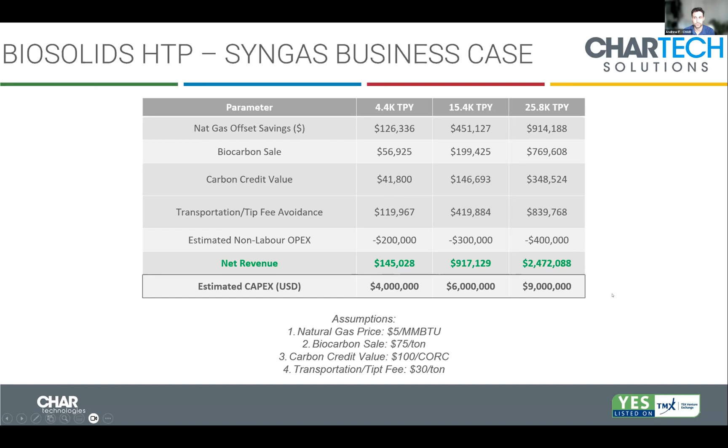And I always like to show financials. So assuming that natural gas is about $5 an MMBTU, biocarbon or char, to be conservative, we expected about $75 per ton. And carbon credits are typically trading at $100 per CORC. And a tip fee is assumed at $30. So you can see with our biggest kiln, there's a sub 5-year payback, including all the infrastructure that you need. So it gets more and more favorable as you go to our largest kiln, and that's really our sweet spot. We're more of an industrial scale kiln with regards to our largest.

In terms of the biochar and carbon credit market, this is really an exciting space that we're seeing a lot of growth, and is changing the opportunities for pyrolysis deployments globally. Biochar has a lot of great benefits in terms of water retention, soil structure improvements, no odor. But the big thing is, again, the carbon that you sequester within that structure for thousands of years can be then recognized as credits and sold or retained by the project or the owner of the site. Again, we're seeing biosolids based char at $50 to $100 per ton.

Anyone that's saying that they can get thousands of dollars for char is, I think, not being realistic. Again, biosolids-based biochar is lower on the fixed carbon side. So the carbon credit market is a voluntary market that's really exploded. Puro.earth is the leading platform. There's others, Carbon Future. There's certification platforms like Verra, that's US based, and Puro is now allowing you to pre-sell the CORCs that these projects generate to finance projects.

So everyone recognizes that the carbon dioxide removal credits, or CORCs, are traceable. Unlike buying a plot of forest, you can truly trace where the biocarbon is made from and where it's going. So looking at the value, it's varied over time. We saw a big jump at the beginning of the year, and now it's at just under $120 per CORC. And it is a European-based company, Puro.earth, but if you look at their platform, American companies like Microsoft and Shopify are buying up all the credits, and there are also American companies generating biochar credits through projects across the US. So really exciting developments in this space.

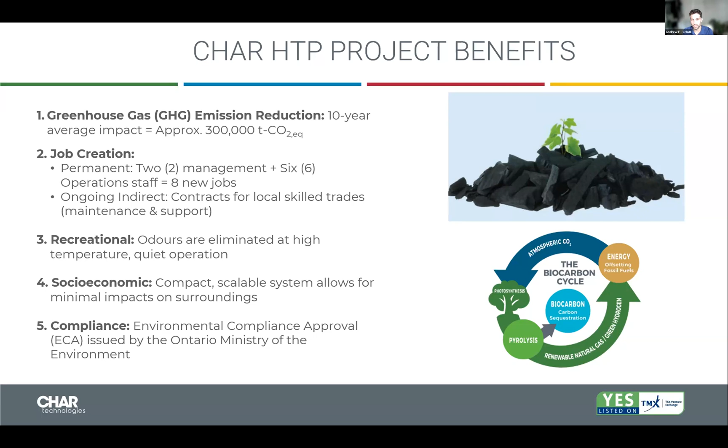So yeah, we're very excited at the opportunity to help eliminate the concept of waste, make some excess energy, and make a higher value biocarbon product that can sequester carbon.